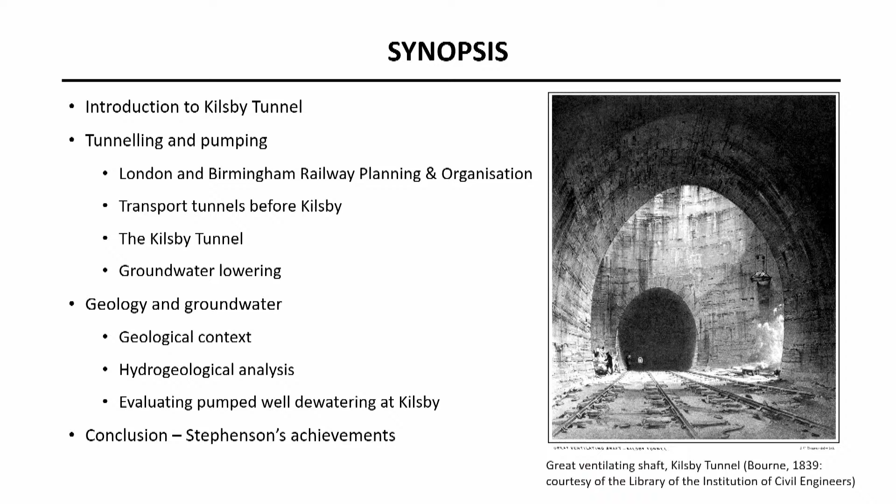I'm going to just run through what we're going to talk about quickly. I'm going to talk a bit about the tunnel, its location, and then about the tunnelling, how the work was carried out, how the project was organised, and, if you like, the history of the pumping and groundwater lowering in the 1830s, and Martin's going to take it from there and give it some real modern flavour.

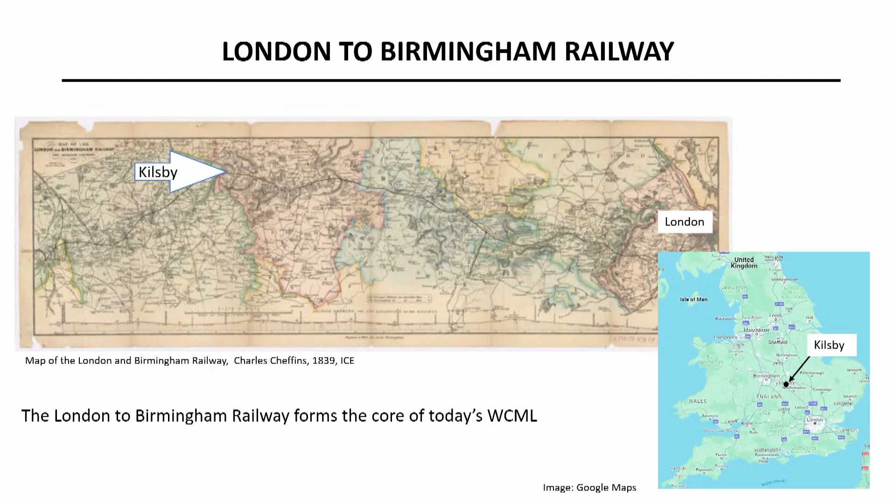So Kilsby Tunnel, for those who don't know it, it's under the Northamptonshire uplands. It's towards the northern end of the London-Birmingham Railway, and it was really on the route because the tunnel enabled a steady gradient to be maintained through the line, and they were very keen on minimising gradients for locomotive traction at that time, so Kilsby was there on the route. So, it was built 1835 to 1838. Robert Stephenson was the engineer. It was his first major project and really made his reputation internationally.

Kilsby was contract 7F. The contractor originally was Joseph Nowell, who came from a family of established contractors. It was one of 6 tunnels on the line, but by far the longest, and at the time of its construction, the longest railway tunnel in the world. Because of the problems which we're going to come to, costs escalated, they trebled. It was the biggest overrun on the line, which was full of overruns actually. And the major challenge was quicksand at the southern end, a large bed of it, which was unforeseen. And these problems were solved by means of an extensive groundwater pumping exercise, which was unprecedented for the time, coupled with careful observations which enabled Stephenson and his team to work a way through.

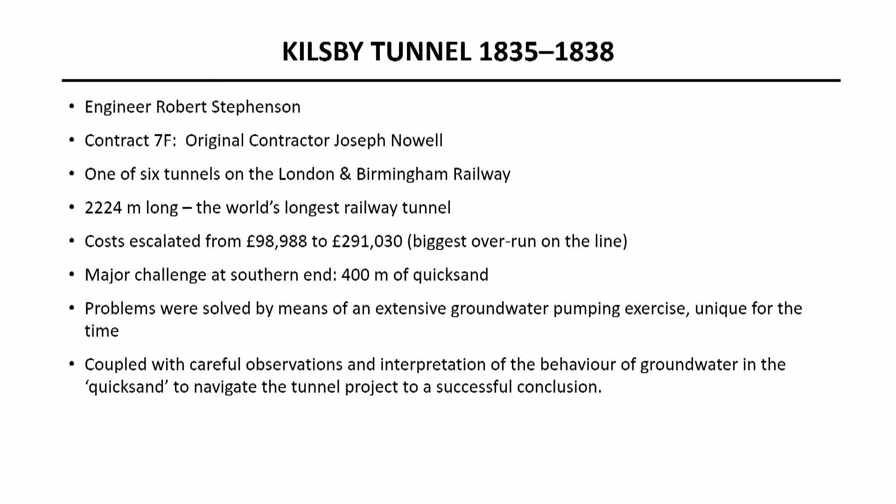So, the project, London to Birmingham Railway, its organisation really followed the typical organisation of construction contracts that have been in place certainly since the time of Smeaton on the Forth Clyde Canal, where you had the engineer, you had generally then for infrastructure projects, a committee of proprietors, and then under the engineer there'd be a group of resident engineers, assistant engineers in charge of parts of the line.

And in the case of this line, there were committees at the north and south, at the Birmingham and London end, and there were assistant engineers, Gooch, Forster, Crosley, Buck and Fox, covering roughly equivalent sections of the project. So Gooch was at the top and Fox at the bottom end.

Crosley and Buck were very experienced canal engineers, much more experienced than Stephenson at the time, whereas Gooch and Forster were more or less contemporaries of Stephenson, and Gooch had been George Stephenson's amanuensis on the Liverpool-Manchester.

Like most of these projects, there were surveys carried out. The surveys had begun in the 1820s, and two rival companies were trying to get an Act of Parliament through. In the end, it was the Stephenson route that prevailed, although the first bill they put forward was unsuccessful. And once the Act was passed, they moved fairly quickly.

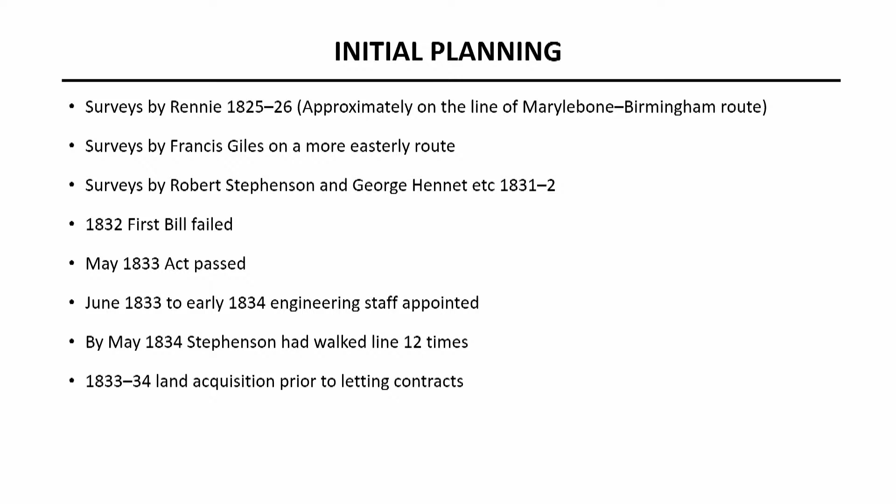Well, Stephenson's decision was to let the lots in relatively small lengths because he was concerned about the capital resources of the contractors. And I think the size of the contracts actually put off the more successful contractors because there wasn't enough money involved. But Kilsby Tunnel was pretty evidently going to be quite a challenge, so it was a contract on its own. Most of the contractors had considerable experience, including Nowell.

The contracts were let from May 1834 to December 1835, and they started with the north and southern end because they wanted to get traffic moving as quickly as possible, and detailed specifications and contract documents were provided so the contractor knew as much as the engineer knew about what the job involved. And this was the approach that Brunel directly copied on the Great Western and elsewhere.

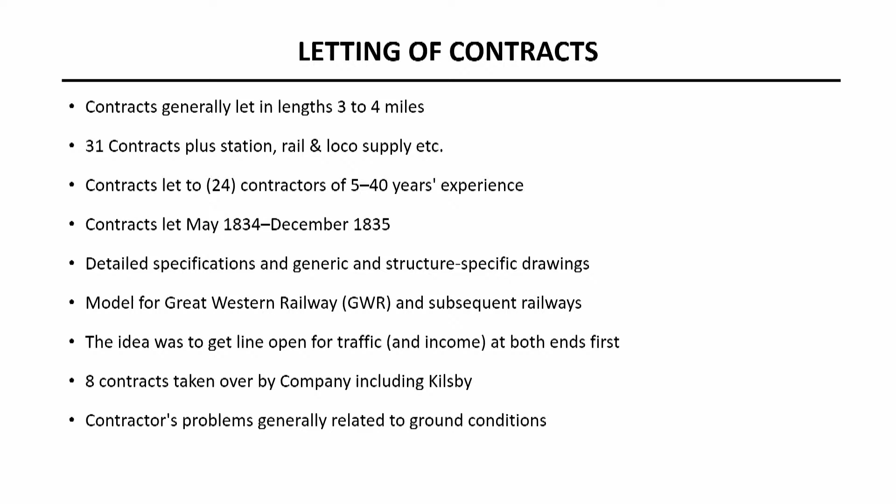Many of the contractors failed or ran into financial difficulties, including at Kilsby, and these were generally due to the ground conditions. So, a bit of context, transport tunnels before Kilsby: well, it had 70 years of the canal age, really, and there were at least 10 canal tunnels that were longer than this, and many of them had had problems.

And interestingly, Stephenson had only envisaged 6 shafts on the length of this, and all the precedents really had far more working shafts involved. If you work out the time he thought it would take, the 6 shafts might have worked, but they didn't really take account of the geology. And there was also an enormous difference in the kind of pumping and access equipment used.

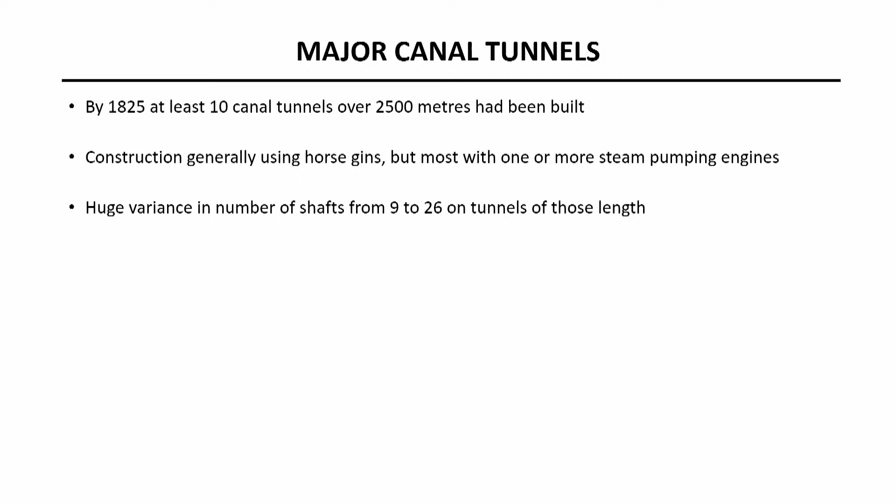So in the canal age, really portable steam engines, sort of steam engines you could move around on site, prior to 1800 weren't really available. So most of the tunnels were worked using horse gins to get material in and out. This is a drawing from about 1820.

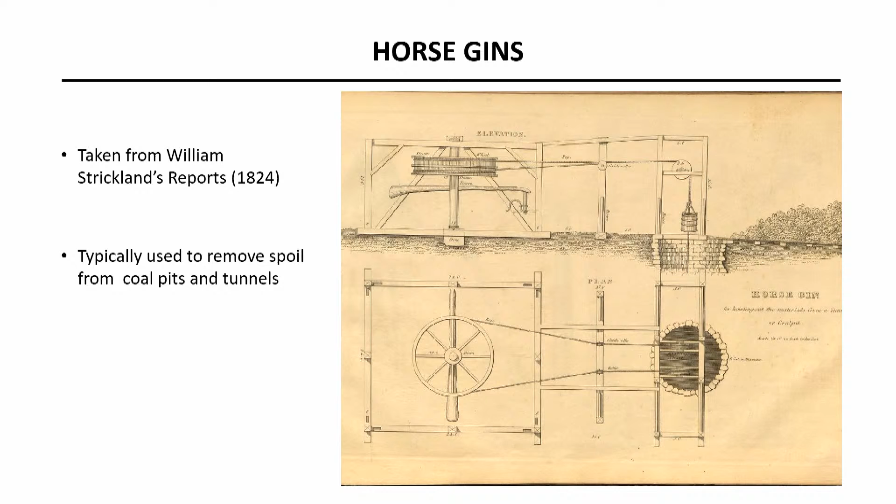But by 1820, tunnelling had come on quite a way, and there were 3 tunnels built around that time by Pritchard and Hoof, who were contractors who worked on a different length of the London-Birmingham Railway, who proved very experienced. And on the Strood Tunnel and Harecastle Tunnel, which were 2 of the longest, they had, hopefully you can see here at least, some dismountable centering, and these tunnels were built in the space of 2 or 3 years, whereas many of the 18th century tunnels had taken considerably longer.

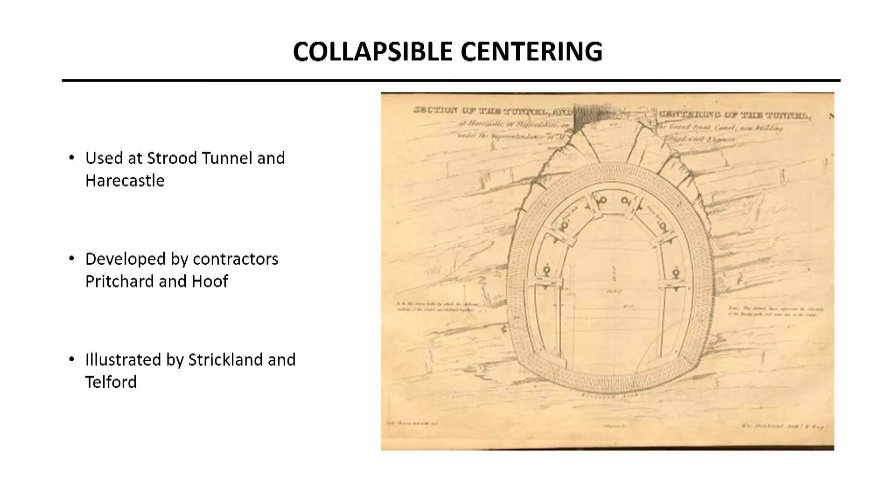Wapping was reasonably successful. Canterbury, on the Canterbury and Whitstable Railway, was completed before Kilsby began. But the tunnel on the Leicester-Swannington Railway hit difficult ground conditions, which really anticipated the sort of problems that Stephenson faced at Kilsby. And the initial contractor failed, and the supervision of the engineers was not up to scratch.

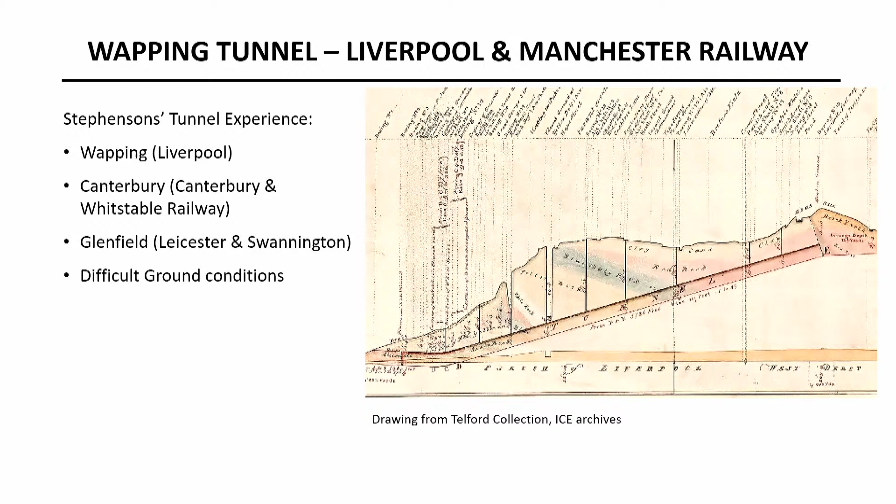That is a bit of a contrast with what we'll discover about Kilsby, really. So Kilsby, a lot of experience here. Stephenson was a mining engineer. Frank Forster, in overall charge of the section, was a mining engineer from the North East.

Charles Lean, who was the junior engineer in charge of the Kilsby Tunnel itself, came from a family of Cornish mine engineers. And the Nowell family, they were very successful contractors. They'd been particularly commended by Telford for their work on the Macclesfield Canal in the 1820s. So everybody knew what they were doing, and everything looked set fair.

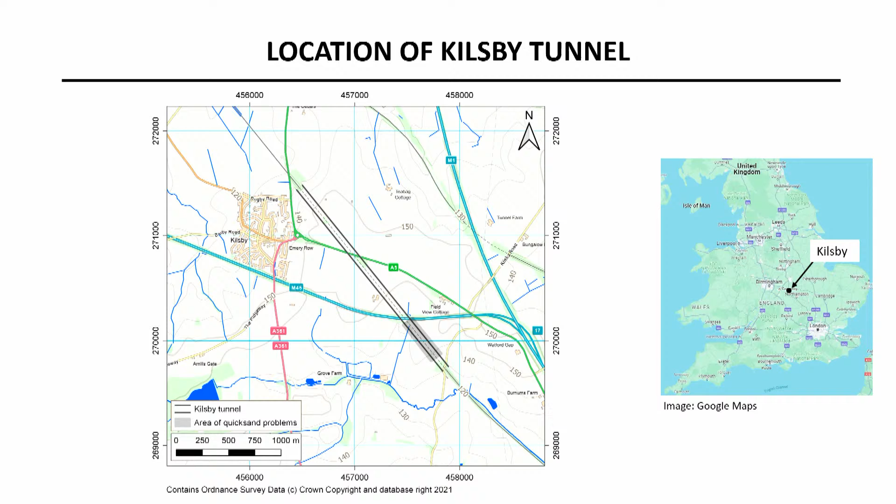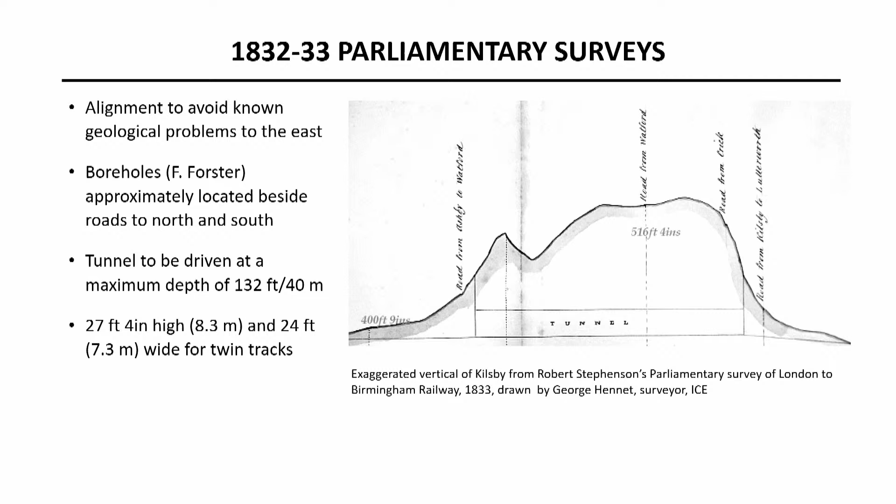And so they had no reason initially to panic about whether they were going to hit anything awful. I mean, it was a long tunnel. They knew there might be some problems. But they felt the strata would be continuous, and so they began work. And the first thing Stephenson's team drew up was a specification and drawings for the tunnel. So the drawings showed the portals, cross-section of the tunnel, how it was to be built, with details of the lining, etc.

Initially, it's a sort of 14 to 18-inch lining, and they were using a lime that had some pozzolanic qualities with sand, puddle clay backing, and they had skew backs, which I'll show in a later drawing, on which they built off the brickwork, with 6 working shafts, 2 ventilation shafts, and air shafts to be built as required. And although there were 6 tunnels, the specification varied slightly. So Stephenson was aware that the ground conditions varied from tunnel to tunnel. They weren't all exactly the same.

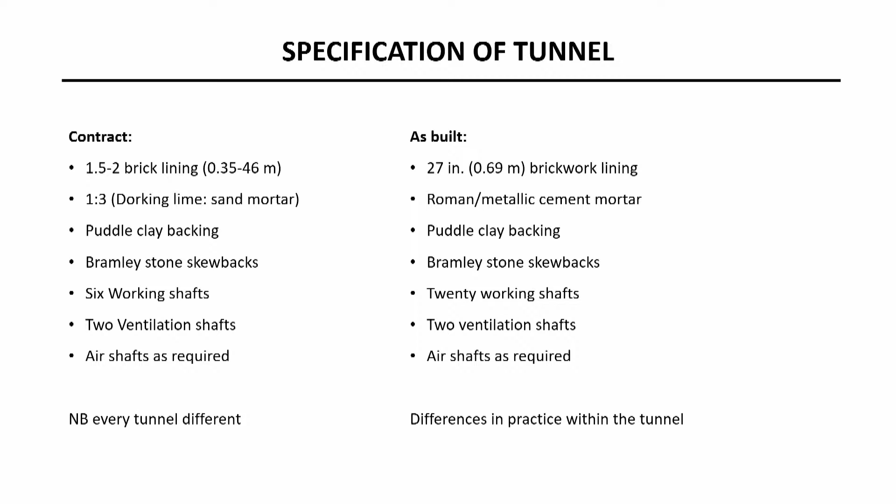What were they expecting the contractors to do? Well, as built, it's a 27-inch brickwork lining. They used Roman cement because of the water, really. The backing's there, the skew backs are there, but there are 20 working shafts. The ventilation shafts are the same numbers and the air shafts. So if you want to see initially why it cost a lot more, well, there's a lot more stuff going on.

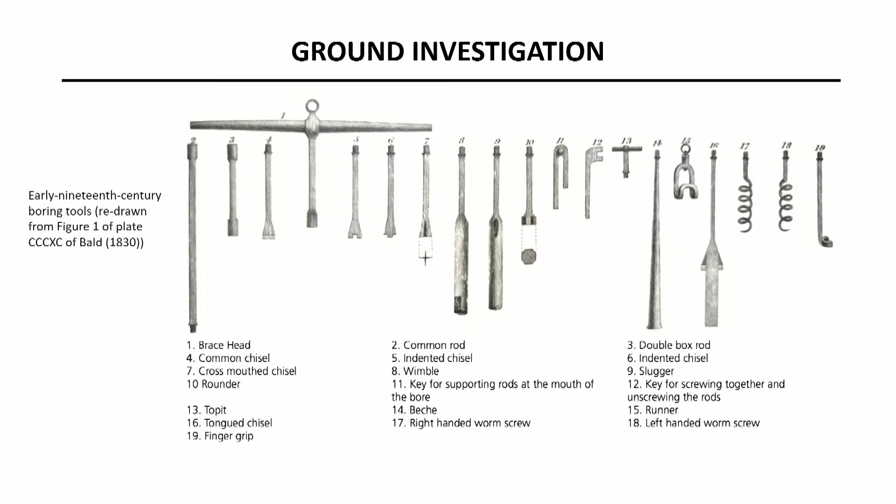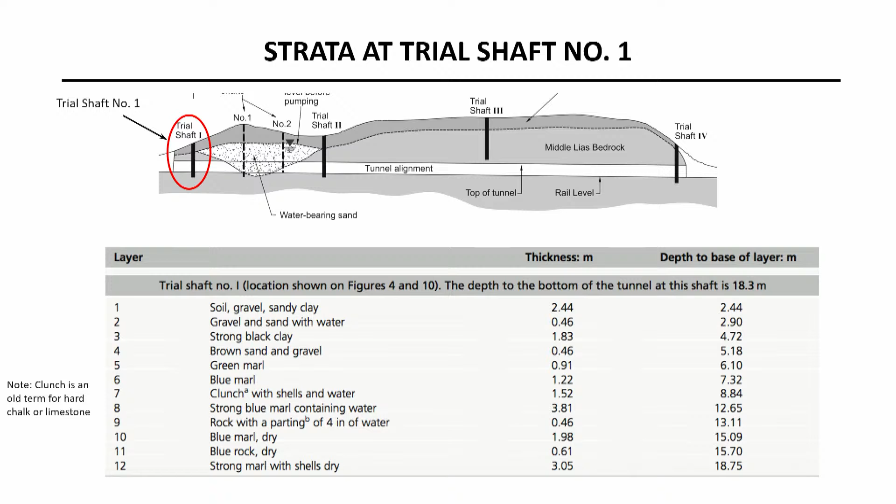And just to give you a flavour, these figures here are taken from the drawings in the ICE, and they give the strata quite detailed. So these are the trial shafts. This is trial shaft 1 here. So you've got obviously the soil at the top, and strong marl at the bottom, dry blue marl, rock with the parting, a bit of water in there. But again, nothing they wouldn't normally think they could contend with. So these were quite good ground investigations, given the number that they dropped in.

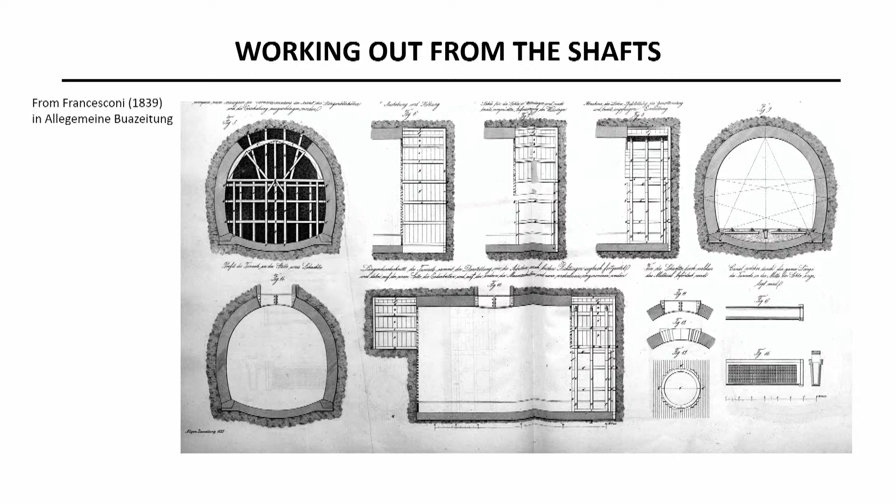And they would have proceeded as here. So this side, once the timbering was done and the heading opened out and everything, the brickies would have been in building up on this side, and then they started on that side. So those doing the excavation, the miners, weren't interfering with the team there. And that's how things were meant to proceed.

And you get a bit of a sense of the scale of it from this. This is a view that was taken in July 1837. You see horses down the bottom. They got the rails in place to move stuff around. There's allegedly 2,000 people working on the tunnel, 200 horses, and perhaps 13 steam engines and a number of horse gins as well. And you can see just about here a man coming up taking up a bucket of spoil. So labour intensive, some mechanical support.

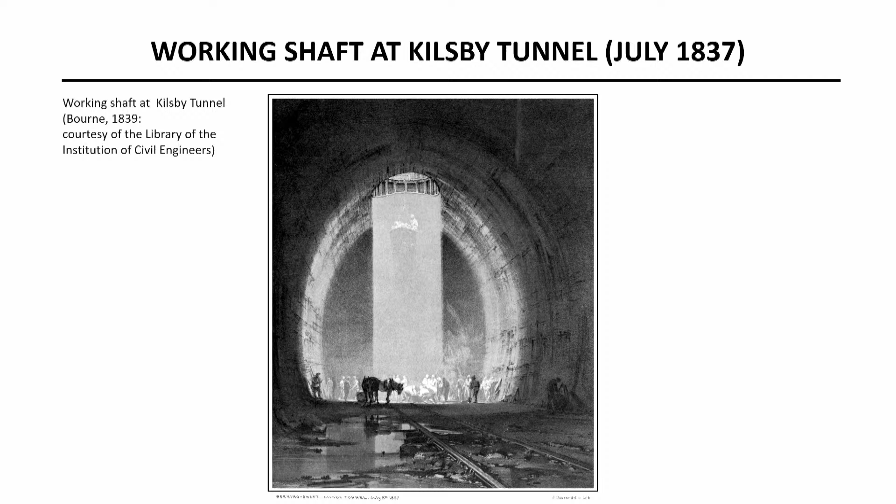So the shafts were sunk in to a depth of 10 foot, and then they bricked them up in sort of 6 to 10 foot lengths as they went round. And the two ventilation shafts were absolutely enormous. They were supposed to have contained 1 million bricks, and they were taken down to formation level because they couldn't see how they could support these. They were 60 foot in diameter, how they could support the weight on the crown of the tunnel. So they were taken right down to the bottom. And the view over here shows the headgear for moving plant and stuff. So the ventilation shafts were used as well to move stuff up and down from the tunnel.

And before I get on to the groundwater issue, there were other issues with water ingress on the tunnel. And Lean, allegedly, well, certainly, saved a group of miners. Where one section had been flooded, they started using a raft, floating it along and getting the bricklayers to the front of the excavation and start bricking it up there, supporting it there from a raft as quickly as possible to prevent collapse.

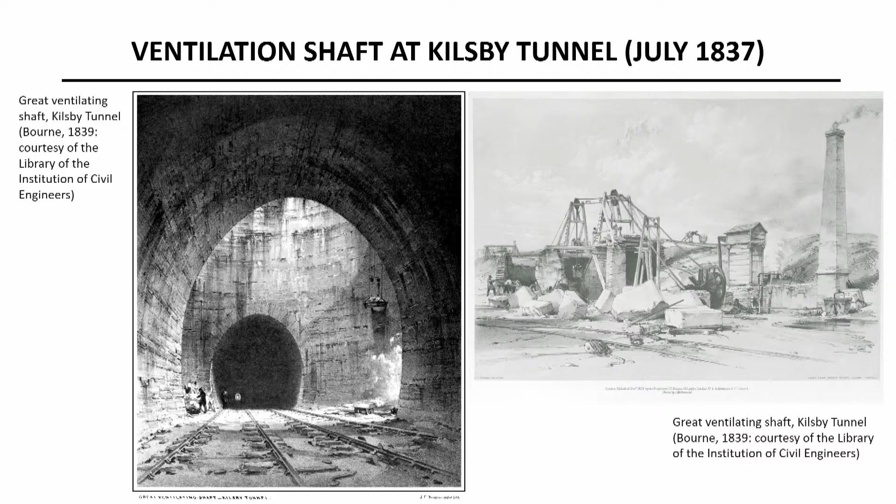Well, some water inevitably came in before they'd finished their work, and they were in danger of drowning, but Lean swam from the nearest working shaft and is supposed to have hauled them with a rope between his teeth back to the working shaft and saved them. There were 28 people died on the job, so he didn't save everybody. Anyway, the great problem very clearly was with this bed of sand that we've seen on the section.

So Forster's boreholes didn't really give a clue as to the likely danger of quicksand. And in May 1835, the contract was let, and soon afterwards, Nowell got on site, and he began sinking 4 shafts, and he put up a steam engine, which was probably to deal with anticipated pumping, but also to bring stuff up from the working shafts.

But in September, they hit a bed of quicksand from working shaft 2, and the usual method of dealing with something like this would have been to drive an adit, perhaps have parallel drains along the tunnel as they've done with some of the canal tunnels nearby. So they did try a couple of drainage adits, but they almost immediately blocked up with sand, and no water came out, so they had to think again. So they were wondering what to do.

Stephenson realised they needed some pumping power, so they ordered 2 more steam engines, 20 horsepower and 25 horsepower, but they took some time to get on site. They tried looking for an alternative alignment, but Forster couldn't find a better route through the Kilsby Hill, and if they went somewhere else, they'd have needed another bill, and they would also probably have lost the confidence of the shareholders, and the railway scheme might have been sunk, so they persuaded the directors that the best thing was to keep on at it.

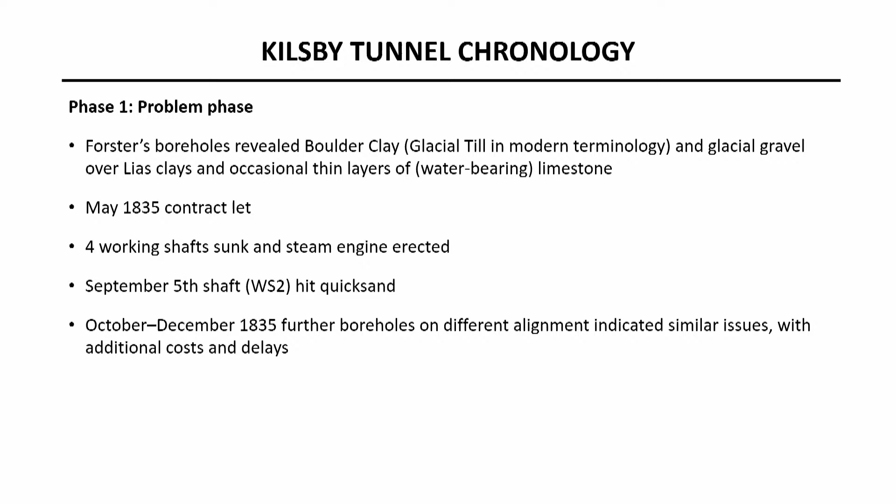And I think at that stage they thought they'd just pump the quicksand dry. The typical mining solution, if you like, at that time would just pump, and hope the thing, to an extent, went away. So they realised they could increase the effectiveness of the pumping engines if they used a flat rod system, which I'll show a picture of in a moment, which meant they could have more than one shaft operated from the pumping engines, and also they could be off the line of the tunnel, not interfere with the tunnel working as well. So it was a well-known technique certainly in Cornwall at the time, so it might have been Lean who suggested it. Well, Stephenson was a bright enough guy to have thought it up for himself, I'm sure.

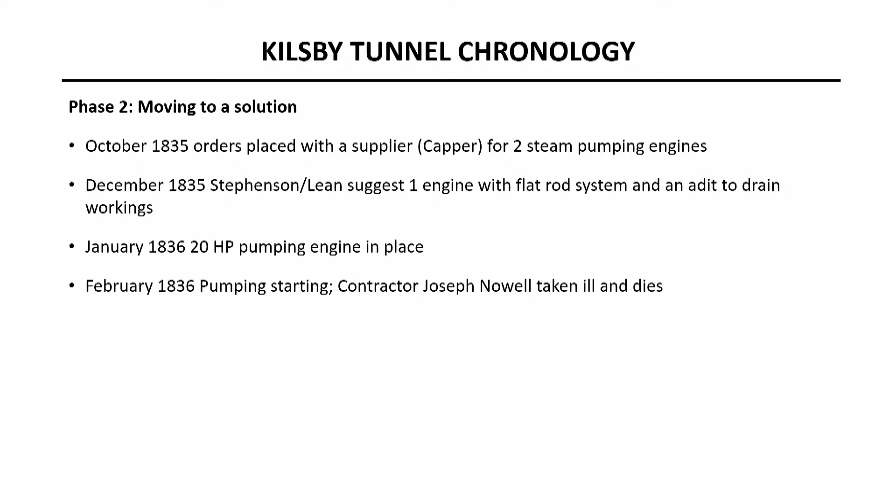So in January 1836, they got a pumping engine going, they start pumping, and Nowell, relatively elderly, suffers a heart attack. In some accounts it's suggested it finished him off, but I think the real problem with the contractor was that Nowell's death meant they had no capital, they had to sort out his estate, so they couldn't carry on. So it really fell to Stephenson and Lean to work out what to do, and in a sense Stephenson becomes the contractor.

It's a direct labour job, and he does the sort of things you'd expect a contractor getting first onto site to do. Build a railway over the hill so he could move people and muck around and equipment. Have more working shafts so you could maximise what's going on in the dry bits of the tunnel while they sort out the quicksand problem, and power those in the deeper sections with 6 additional 6 horsepower engines, with a larger one to act as a mortar mill for brick making and cement making. And at that stage, I think he thought they needed 20 million bricks. Well, they needed a lot more than that in the end.

So they sunk pumping shafts off the main tunnel alignment. They were sunk with timber tubbing rather than with brick lining. They reached rail level 6 to 7 months after they'd started work. So it took a long time before they started to really get going in the quicksand. And they began sinking the shafts into the quicksand in November, and then began tunnelling in December. And you'll hear a bit more about how that became possible from Martin.

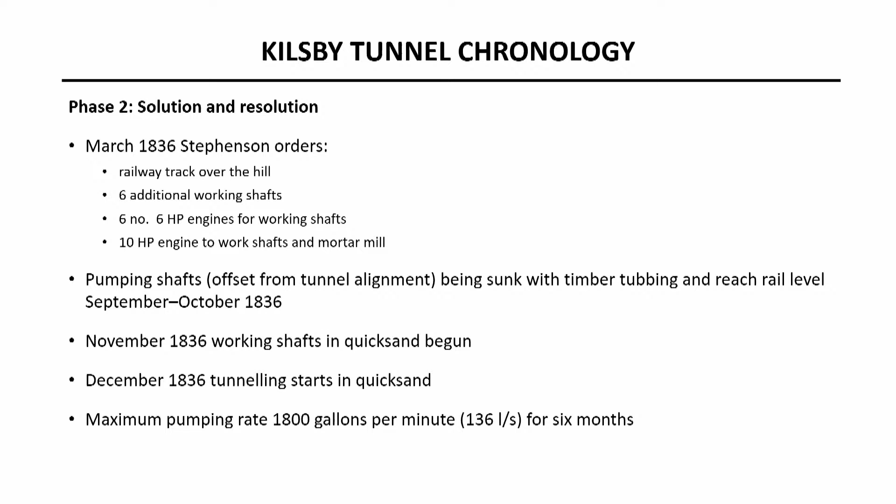But the amount of water they were pumping out, 1,800 gallons a minute, 136 litres a second for 6 months. And so it went on. There were inrushes. It wasn't really until the tunnel was finished that you could say it was safe from collapse. And just to give you an impression of the additional, there were originally meant to be 6 shafts on the line of the thing.

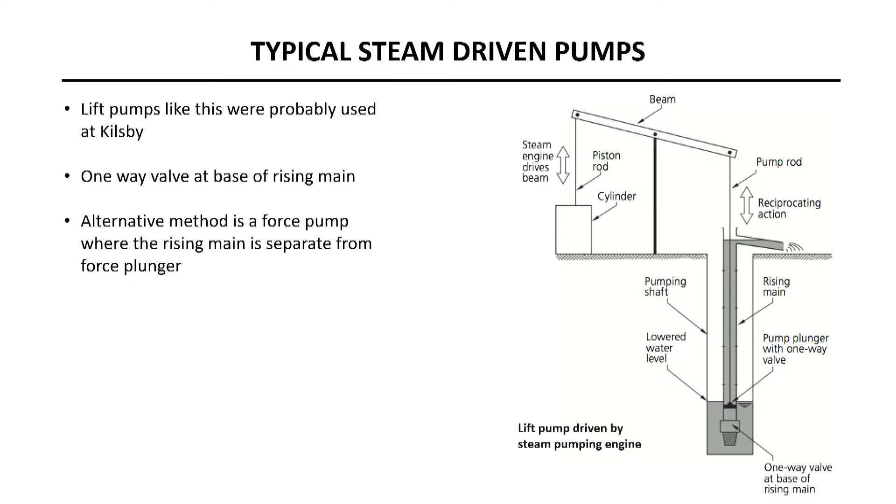It was a great team, and just to give you a flavour, I'm going to end with a couple of quotations here, just to put what Martin's got to say in some context, really. So, this is for the bricklayers. Even while under the protection of the immense pumping power, it often happened the bricks were scarcely covered with cement, ready for the setting, ere they were washed quite clean by the stream of water which poured down overhead. The men were accordingly under necessity of holding over their work huge whisks of straw and other appliances to protect the bricks and cement at the moment of setting.

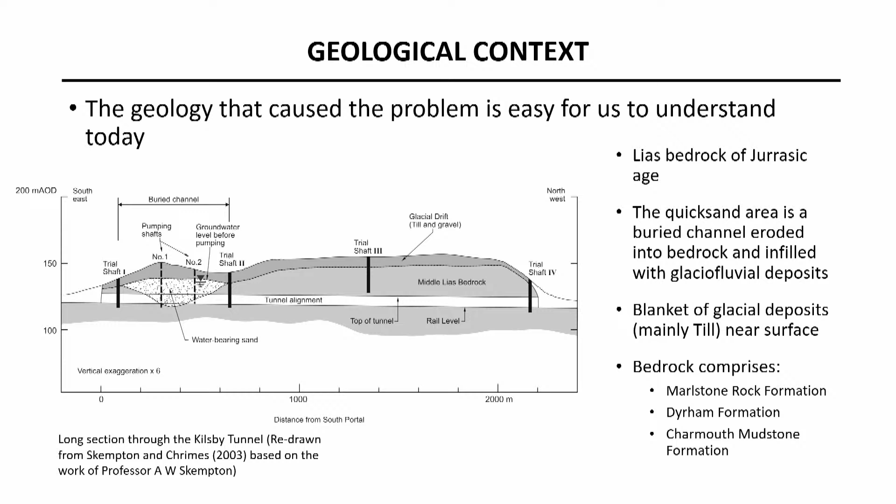So the question is, how do we know? What information do we have about the geology? And we actually have the as-built geological records. There is a digitised version of a long section from the 1830s, and that is the actual paper copy laid out upstairs in the library.

And any of you who've ever logged a face or you've tried to convert daily records into a record of what the tunnel's been through, you can totally get what these people have had to do. You can see how difficult it is to read at any scale. You know, it's a bit of a legend there and so on, because you've got a very long linear structure. The coloured pencils have been out and so on. But obviously, when you get it in your hands, it's tremendously impressive and actually very informative.

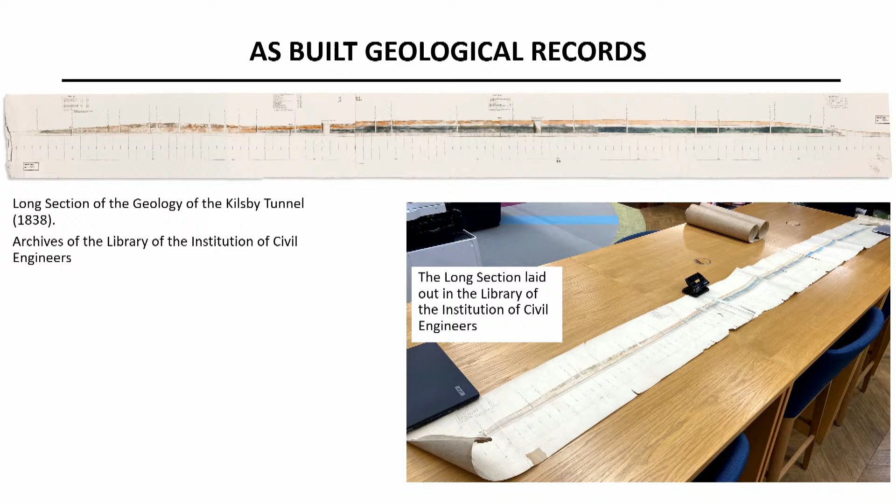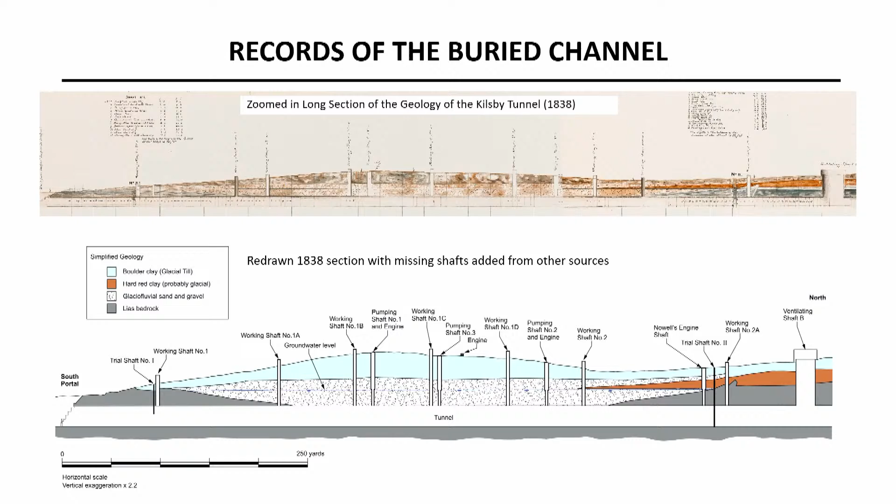But I don't think even if you had modern information, you would automatically think that there was a big channel of buried granular material there. But I think you would possibly pay attention and maybe investigate in that area, because you'd use the mapping to help direct and inform your planning for the boreholes and so on. Stephenson obviously didn't have that opportunity to use that information, and the project boreholes or shafts missed the problem ground by only a little bit. I mean, probably a few people in this room, like myself, think we have, during our career, encountered unforeseen ground conditions, but I think Stephenson has a pretty solid case, as we'll talk about in a moment.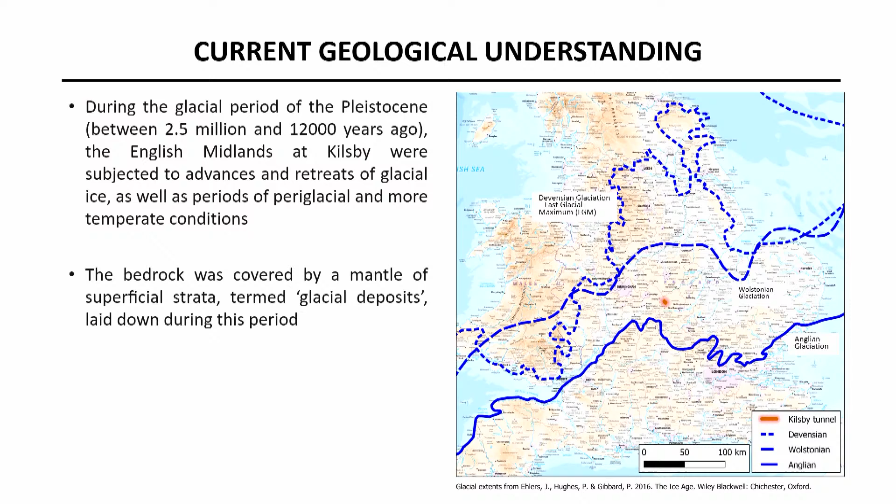And so because we know that the UK has been glaciated in its northern parts, we know that the movement of the ice has left behind a potentially variable layer of superficial deposits that we term the glacial deposits.

And a really key issue is that the bedrock profile might not follow the ground surface, because the advance and retreat of the ice is very abrasive, but then as well you can sometimes get glacial lakes dammed behind ice that can be suddenly released, and you get erosion channels associated with the bursting of ice dams.

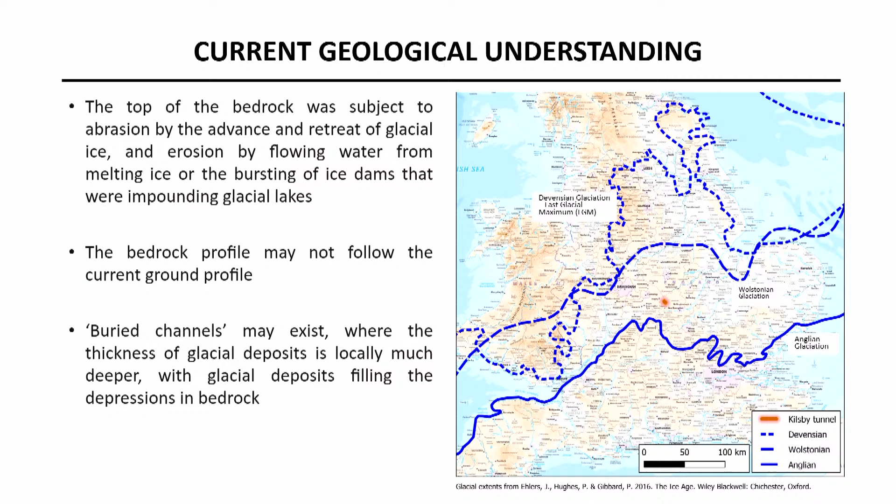So you get scenarios, and I've encountered many in my modern career, of buried channels in the bedrock below the superficial deposit. And even today, they're nearly always bad news in groundwater terms. But that's modern knowledge, so we need to put ourselves back to the 1830s.

And the 1830s was a time of rapid development in geological knowledge. And in the UK, it was actually driven, broadly speaking, by the construction industry. Land drainers, canal builders, they sort of exposed lots of geology. And William Smith famously produced the first map representing the surface geology of the UK.

And if you've not read the book, The Map That Changed the World, it's quite an interesting story, both about the map and about Smith himself. And this is one of the versions of Smith's map. There's no evidence that Stephenson directly used Smith's map, but it's quite clear from Stephenson's general methods of working that he and his advisors will have consulted experts with local knowledge, and they will have used the most relevant information.

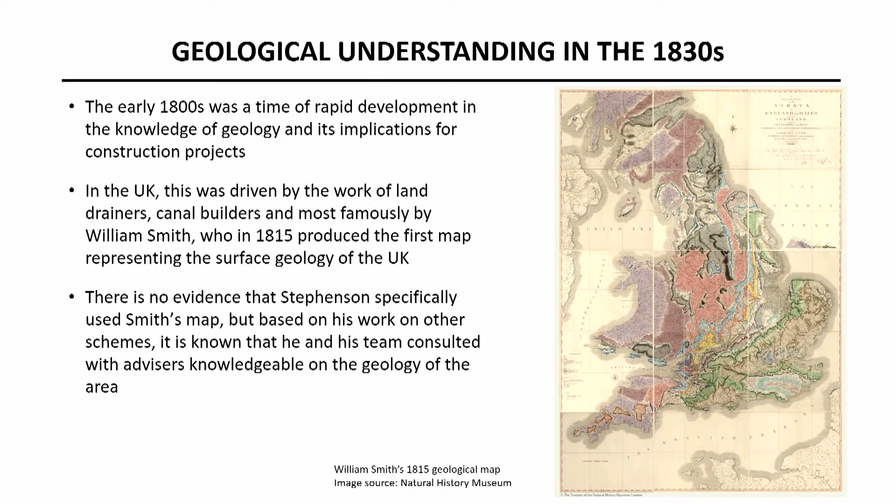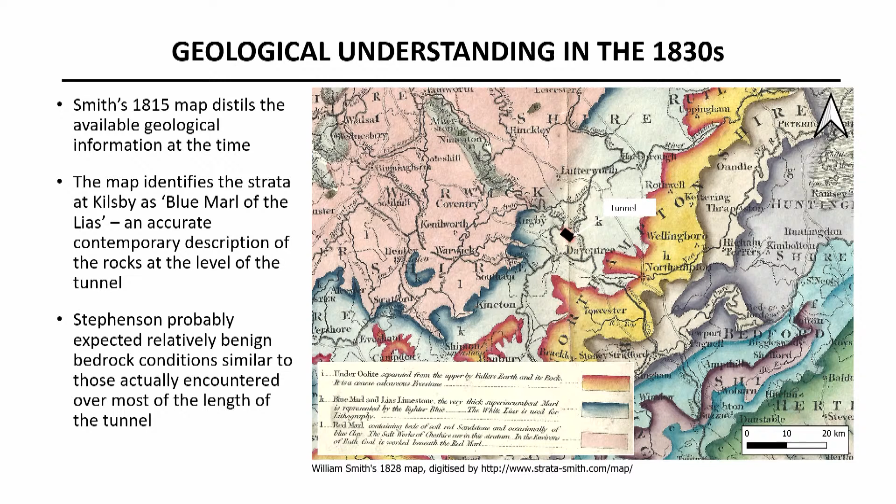So the question is if we can look at Kilsby on Smith's map, how does it compare? And in terms of the bedrock geology, Smith's map is spot on. So there's the Kilsby Tunnel, and it's in something known as the blue marl of the lias, which nowadays we'd think would be a mudstone or a marl. Pretty accurate description of the bedrock conditions that Stephenson encountered, and again a relatively benign tunnelling medium, which is what he actually encountered over the majority of the tunnel length.

And what's interesting, and it didn't really strike me until I was quite a long way into researching this, was that the contemporary reports discuss the groundwater problems almost solely in terms of bedrock. They assume that the water's come from the bedrock, whereas in reality it isn't. It's a much younger strata of glacial deposits. And this is a really key point, again, that I hadn't understood, that the nature and the origin of glacial deposits was not well understood in the UK in the 1830s.

But in the 1830s, glacial theory, as it was known, because it was a theory, was not an accepted concept in UK geology. It's pretty amazing to think that in the early 19th century, many experienced geologists subscribed to the diluvial theory, where the superficial deposits were termed diluvium from the biblical flood, as in diluvium, deluge. And there are papers about the conflict that many clergymen, who were also geologists in their spare time, had when glacial theory subsequently arrived. And glacial theory arrived after Kilsby.

The first serious consideration was probably a meeting in 1840 at the Geological Society of London. Here's the original record. And at the meeting, the Swiss paleontologist Louis Agassiz presented his paper, which was called On Glaciers and the Evidence of Their Having Once Existed in Scotland, Ireland and England. And again, glacial theory was not instantly accepted. There was no eureka moment. But in the following decades, British geologists accepted that the evidence of erosion, transportation, deposition of superficial deposits in the UK could be explained, indeed, by this theory.

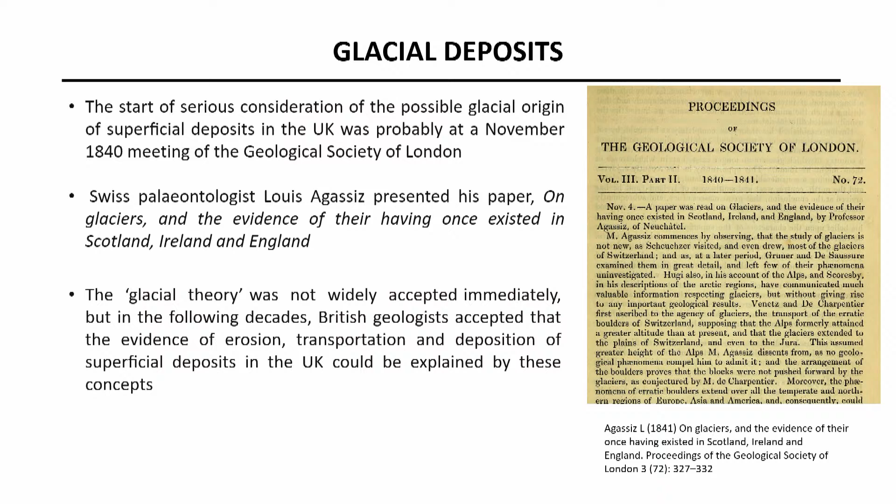But then, how does that relate to construction? And even at the end of the 19th century, the actual impacts of glacial deposits on construction were not widely recognised. Professor William Boyd Dawkins was a very eminent 19th century geologist, and in 1898 he gave his James Forrest lecture to the ICE, I imagine, in this very room 126 years ago.

And his lecture was on the relation of geology to engineering, and he said, at first sight, it would seem improbable that geological theories connected with the Pleistocene age and the glacial period should have any relation to engineering work. Nevertheless, they have a most important bearing on engineering results in connection with the superficial accumulation covering the solid rocks over a large portion of the British Isles.

So, viewed in the light of the absence of understanding of glacial theory, Stephenson's problems absolutely are unforeseen ground conditions, not predicted by his team or encountered by precision borings. It seems, like Mike said, just bad luck or random chance that borings missed the buried channel of sand.

And I know David Hartwell's in the room, and David Hartwell, I believe, worked on a project in the 90s where the boreholes missed a buried channel in a rock tunnel and caused various problems. In the paper we do talk about how there's still modern parallels to this.

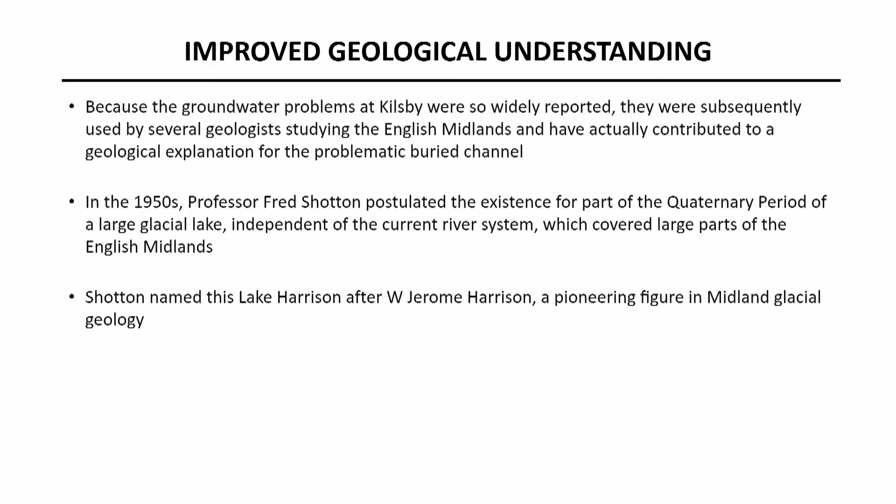Another really fascinating thing is that at Kilsby Tunnel, the problems helped explain themselves, by which I mean that the groundwater problems are so widely reported, subsequent geologists in the 20th century actually used that information to better understand the geology of the English Midlands. In the 1950s, Professor Fred Shotton postulated the existence, for part of the Quaternary period, of a very large glacial lake independent of the current river system, which covered large parts of the English Midlands. And Shotton named this lake Lake Harrison after W. Jerome Harrison, a pioneering figure in Midland glacial geology.

Now let's do a bit of geotechnics. And like Mike says, Stephenson was all in on this project, and by the time he was committed to dealing with it by pumping, it must have been a daunting prospect to try and drain the whole of the quicksand. And there were no analytical tools to hand, never mind no computers, there were no equations. Darcy's law, I'll talk about in a moment, was still 20 years away. But Stephenson used observation and logic, presumably, to understand the effect of pumping from widely spaced wells, and he deduced it was not necessary to drain the entire body of sand.

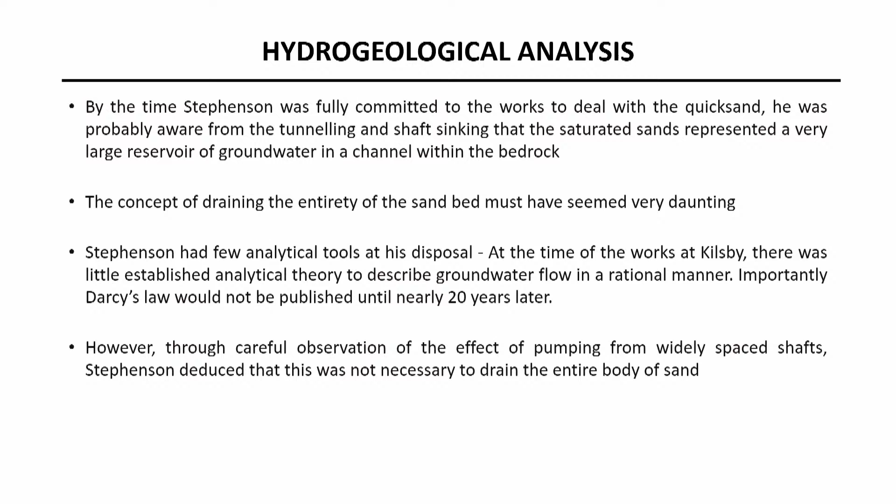And again, Stephenson wasn't a prolific author of papers, unlike others, and so he didn't really write up this aspect of Kilsby at the time. But several years later, he was working on the water supply to London, looking at abstraction from the chalk in some areas. And in the 1841 reports about the water supply of London, he talked about his personal observations at Kilsby, and he said, so we talk about pumping from shafts:

I was soon much surprised to find how slightly the depression of the water level in the one shaft influenced that of the other, notwithstanding a free communication existed between them through the medium of the sand, which was very coarse and open. It then occurred to me that the resistance the water encountered in its passage through the sand to the pumps would be accurately measured by the angle or inclination which the surface of the water assumed toward the pumps, and that it would be unnecessary to draw the whole of the water off from the quicksand, but to persevere in pumping only in the precise level of the tunnel, allowing the surface of the water flowing through the sand to assume that inclination to which it was due to its resistance.

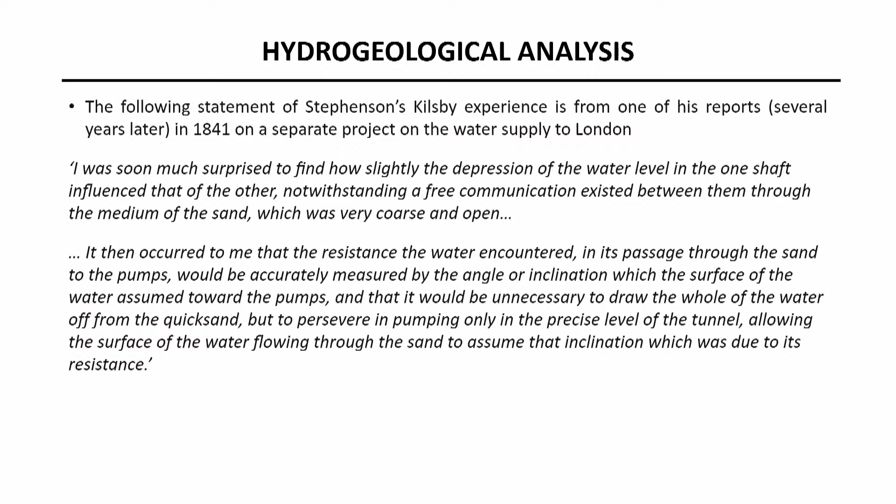Very wordy, but I'll explain to you what this means and why it's relevant. So here we have the sort of thing you might see in a textbook. We've got our Kilsby Tunnel being dewatered in this case by some hypothetical shafts on either side. And we all know that if the dewatering works, we draw down the water level at the tunnel, but we don't draw the water level down an infinite distance either side. We get something that we might term a drawdown curve, and we know if we go a certain distance away, the water level will eventually get back towards its original level.

Stephenson proved this. He installed some distant monitoring wells 180 metres from the tunnel and showed that after 12 months of pumping while the shaft was dewatered, the groundwater level there had hardly been reduced. And he wrote again in 1841,

the simple result, therefore, of all the pumping was merely to establish and maintain a channel of comparatively dry sand in the immediate line of the intended tunnel, leaving the water heaped up on each side by the resistance which the sand offered to its descent to that line on which the pumps and shafts were situated.

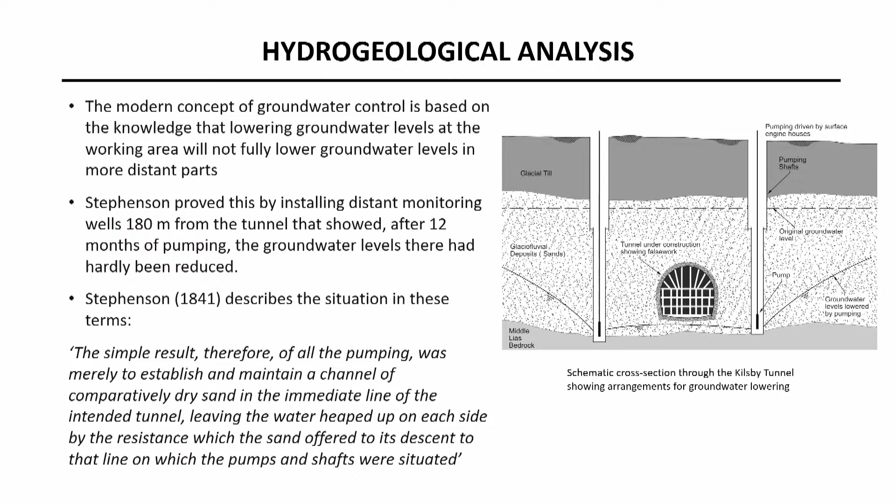And so Stephenson concluded that the water flowing through a granular soil had to have some sort of driving force. There was a resistance. And so when you abstract at a certain point, at a well or a shaft, the water flowing to that level has to have some energy to overcome that resistance. And the way that driving force or energy is provided is that the groundwater level or head at the distant point must be higher than at the shaft, and that's what drives the water towards the shaft or the well

to overcome the resistance. And Stephenson's observation of the gradient of the lowered water table, that we'll call the hydraulic gradient, predated theoretical formulation of groundwater flow, including Darcy's law, by nearly 20 years. But I've applied, compared with modern theories, including Darcy's law, and we can understand how prescient Stephenson's work was.

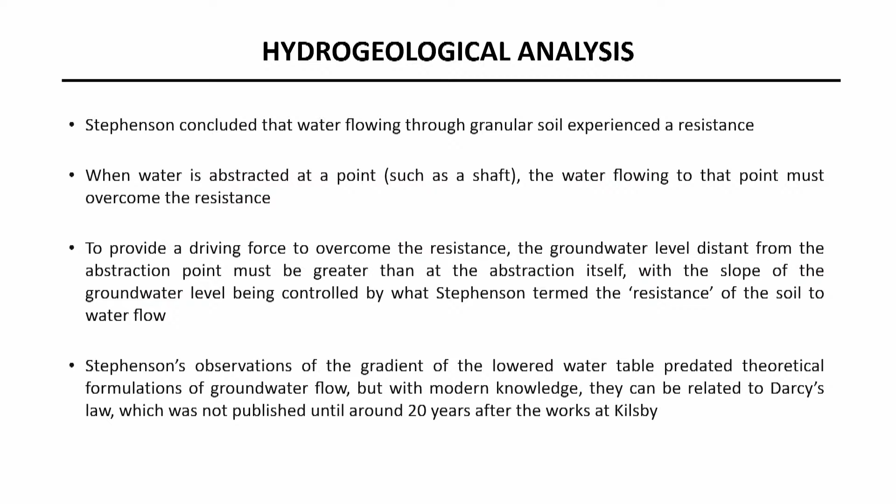So I've mentioned Darcy's law, and hopefully most of you have heard of it. Darcy's law is a really fundamental equation in geotechnical engineering, but it's not actually of geotechnical origin. It actually comes from the field of public health engineering. And it was developed by the hydraulics engineer in France, Henri Darcy. And he wrote in 1856 a report. I'm not going to butcher the French, but his report was basically in English, The Public Fountains of the Town of Dijon. So it's surprising that we're using information from that in our geotechnical analysis.

But he had various vertical columns of sand. This is an illustration from the original report. And he was observing the flow through the sand vertically, and he related the flow rate to the hydraulic gradient. And he developed an equation, Darcy's law, that related flow through the granular medium to the applied hydraulic gradient. And the relationship between the applied gradient and flow was linear.

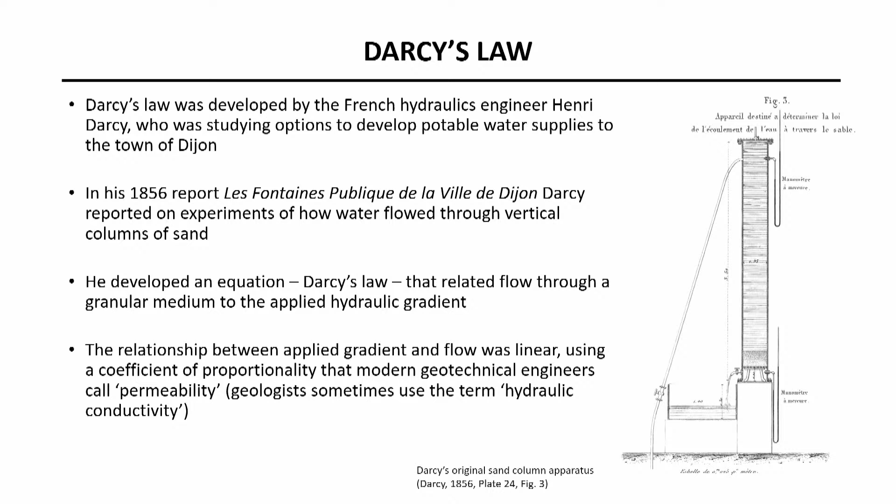It's normally expressed as the groundwater flow rate Q is equal to the product of permeability K, permeability also being known as hydraulic conductivity. So Q is the product of K, the hydraulic gradient I, and the cross-sectional area A. The negative sign is really important because it means that groundwater logically flows from high head to low head. It flows down the hydraulic gradient. We can also express the hydraulic gradient in terms of a head difference delta H and a flow path length L, and that therefore tells us that the hydraulic gradient is actually the slope of the water table at any

particular point. So if we try and visualise that in terms of a tunnel with wells either side, I drew this diagram to illustrate a sort of theoretical thing in a lab and the real world scenario. So this is in a lab, and imagine that we have our reservoirs of water either side with a high head, and we just add water in to keep it topped up. But in the middle, we have our low head. This is where we're dewatering the tunnel, and we're taking some water out. Just by conservation of mass, the water flows in from both sides into the middle, and basically this flow is determined by Darcy's law, and we have a hydraulic gradient there.

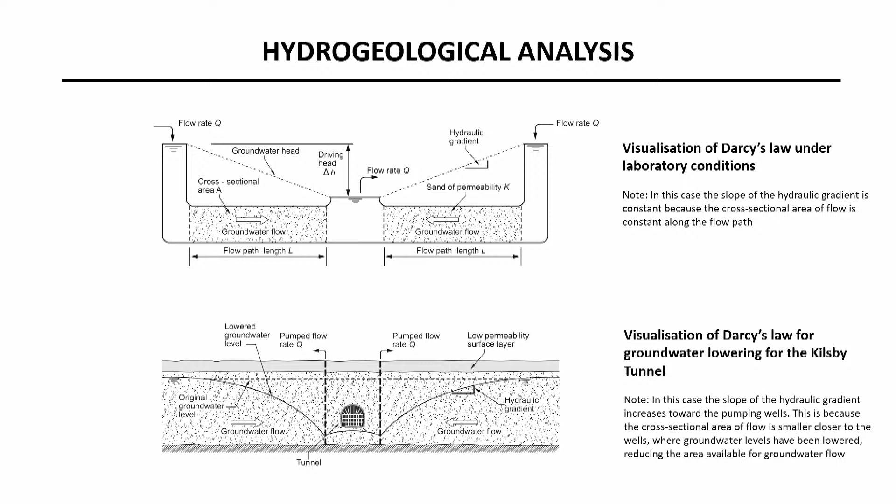And then in the real world, even though this is very schematic, we have our dewatering system around our tunnel, we've lowered the groundwater level here, and we have the water flowing here. The reason this is a curve, the hydraulic gradient's a curve, and it's a straight line here, is because the geometry is different, but the principle is the same. The point is the hydraulic gradient is the slope of the water table at any given point. So how do Stephenson's observations relate to Darcy's law? Because Stephenson does not use the term permeability or hydraulic conductivity.

He uses the term resistance, and he stated, leaving the water heaped up on each side by the resistance which the sand offered to its descent to that line on which the pumps and shafts were situated. And mathematically, the resistance is the inverse of conductivity. So we can express the resistance here as 1 over K. And we can rearrange Darcy's law that shows us the hydraulic gradient. I won't go through the maths, but we end up with the hydraulic gradient is indeed proportional to the resistance.

And so, based on observation, Stephenson expressed in words rather than mathematics essentially the fundamentals of Darcy's law 20 years before. So there is an alternative timeline. If Stephenson had been better at writing up his site notes, we might be talking about Stephenson's law and hydraulic resistance instead of hydraulic conductivity.

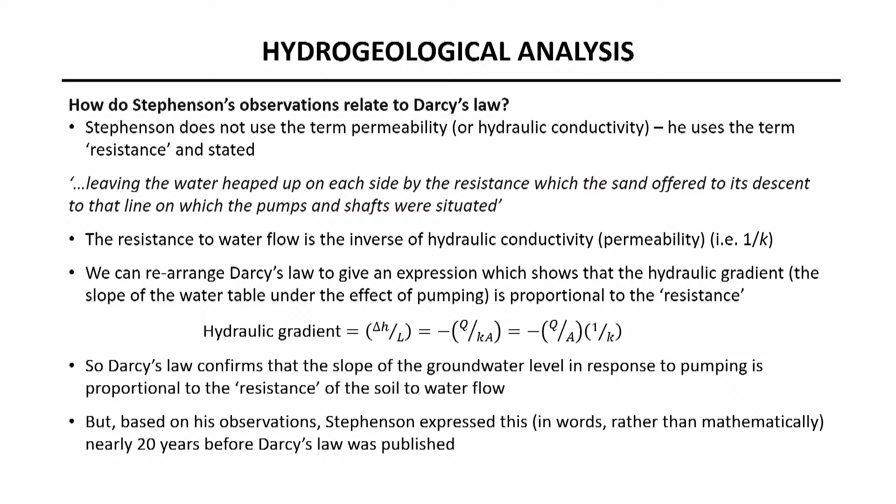So the final part of the talk is I just want to evaluate the use of groundwater lowering, because the Kilsby Tunnel in 1835 to 38 is widely quoted in literature as being the first application of pumped well groundwater control. That's not strictly true, because a few years before, the elder Brunel, Marc Isambard, used groundwater lowering when sinking the Rotherhithe shaft.

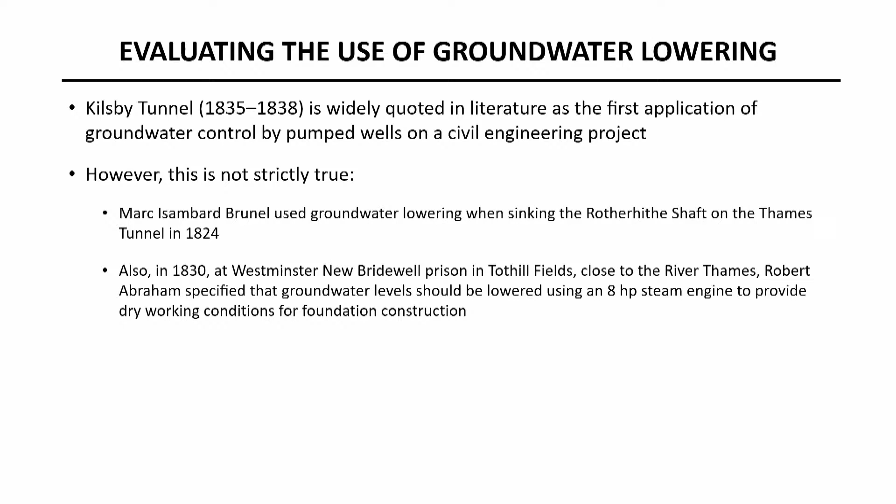And also in 1830 at Westminster New Bridewell Prison, not so far from here, just near St James's Park, Robert Abraham specified that groundwater levels should be lowered using an 8 horsepower steam engine to provide dry working conditions. But these are pretty small scale. And there's no evidence that Stephenson and his team were aware of these applications. But what they were aware of was nearly 100 years history of quite significant pumping from mine shafts. But I think in terms of construction, the work at Kilsby should be recognised as the first large-scale application of groundwater lowering on a construction project anywhere in the world.

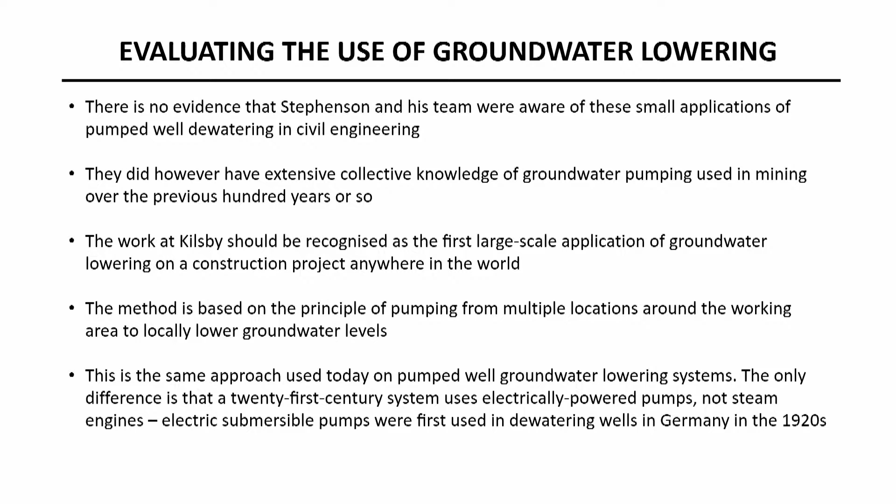And the principle of the operation is essentially to pump from multiple locations, multiple shafts in this case, wells in modern parlance, and that would lower the groundwater level. It's the same approach we use today. The only difference is today we would use, generally speaking, electrically powered pumps, not steam engines. And electrical submersible pumps were actually first used in dewatering on the Berlin subway in Germany in the 1920s.

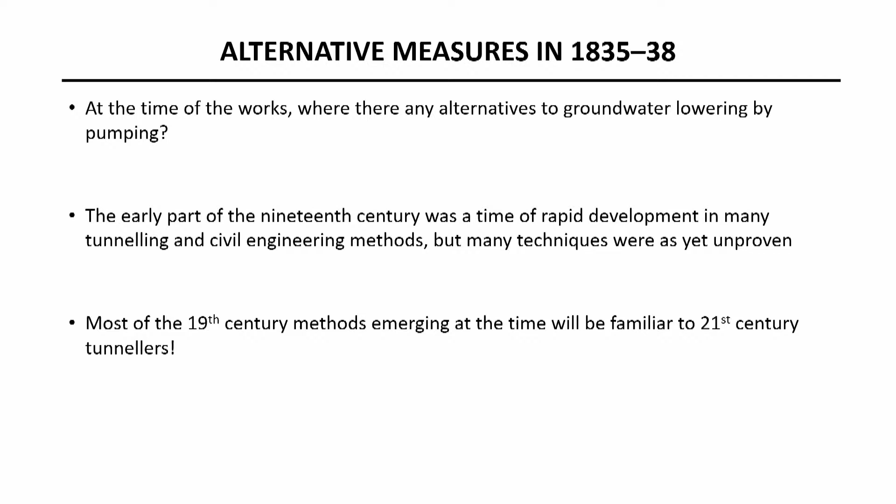And finally, was groundwater lowering the only solution? At the time of the works, were there any alternatives to groundwater lowering by pumping? Because this time, the early 19th century, was a very dynamic time in terms of technique. So I've come up with some other options. And interestingly, most of these 19th century techniques are still used by people in this room today.

So first thing is, we could have sunk the shafts as caissons maybe. Caisson sinking, we build a cutting edge, and then you build your structure above the cutting edge, and nowadays you jack it in the ground. Back then you would have put kentledge on to weigh it in the ground, and your structure would have been masonry, brickwork, or cast iron tubbing. And obviously by sinking it as a flooded or wet caisson, you would have counterbalanced the quicksand if you did it right. I think it's a pretty hard sell. You've got the hard glacial till above the sand, and even if you sunk the shafts, you wouldn't have really dealt with the tunnelling. So I'm giving that a no.

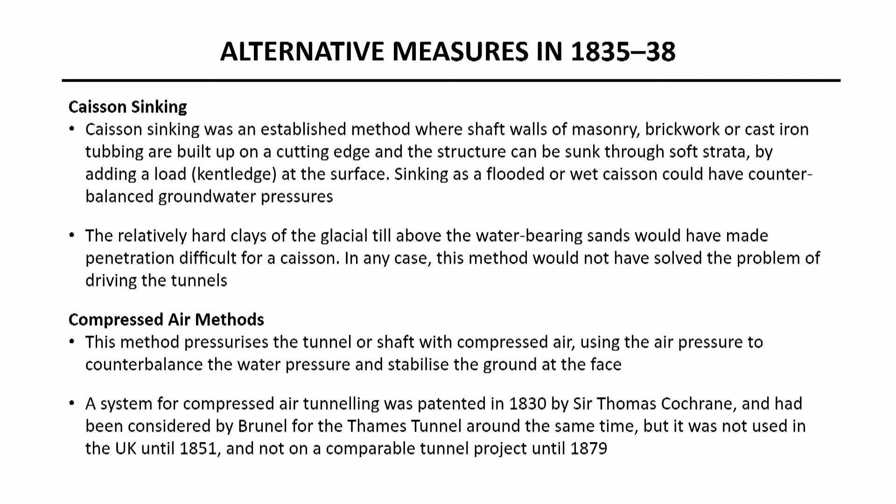The approach at Kilsby was a pumping approach, but for groundwater control we can sometimes go for the exclusion approach. And exclusion approach basically would involve trying to install some vertical barriers either side of the tunnel. So essentially we're isolating the tunnel by toeing into the mudstone bedrock below. We then do a limited amount of pumping inside here, and we keep the water level high on the outside. Dramatically reduces the pumping volumes. One of the challenges is that at its deepest, the mudstone's about 40 metres down, so it's a pretty challenging depth to get a cut-off method down to.

An option we might think about today would be steel sheet piles. In the 1820s, cast iron sheet piles were in use. They've been available for a little while. They'd taken over from weaker timber sheet piles, but there's no way they'd have been able to be driven to the required depth. We could have permeation grouted, and cement-based grouting had been developed in France in the preceding decades, but it wasn't applied in the UK until the 1850s, after Kilsby.

In any event, the sands were probably too fine to be dealt with by cement-based grouts, and the more effective and more penetrating chemical grouts weren't developed till much later. One of the first was the Joosten process, patented in Germany in 1925.

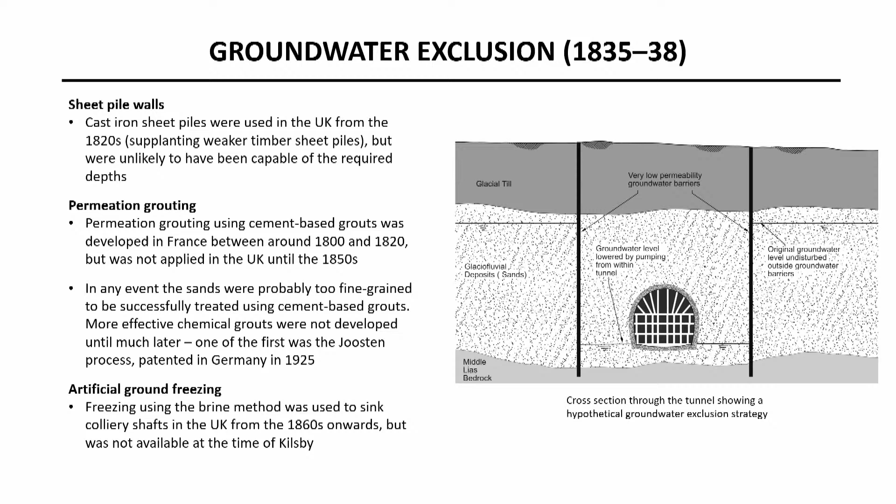Ground freezing has undergone a bit of a renaissance in the UK at the moment for various cross passages at Silvertown and other places, but it's a 19th century technology. It was first documented as being used on mine shafts in the UK from the 1860s onwards, but obviously it wasn't available at the time of Kilsby.

So now Mike and I agreed that we conclude with going through Stephenson's many achievements. The first thing is that in terms of project management organisation, the London-Birmingham Railway was a model of project planning organisation. Stephenson had an experienced team, and he recommended established tunnelling techniques suitable for the conditions expected. But the methods weren't suitable to the quicksand conditions he encountered, and decades of canal construction had shown how difficult it is to work in such bad ground.

But after the early shaft sinking works encountered the quicksand, Stephenson and his team drew on experience in the mining industry, and they developed the solution using multiple steam engines pumping from shafts. They used flat rod systems to transmit power horizontally to minimise the number of engines needed. Stephenson established a large-scale groundwater pumping system, unique for the time, to lower the groundwater levels and stabilise the quicksand. The reported pumping rate was 136 litres per second for several months, and ultimately, despite cost overruns and delays, the tunnel was constructed.

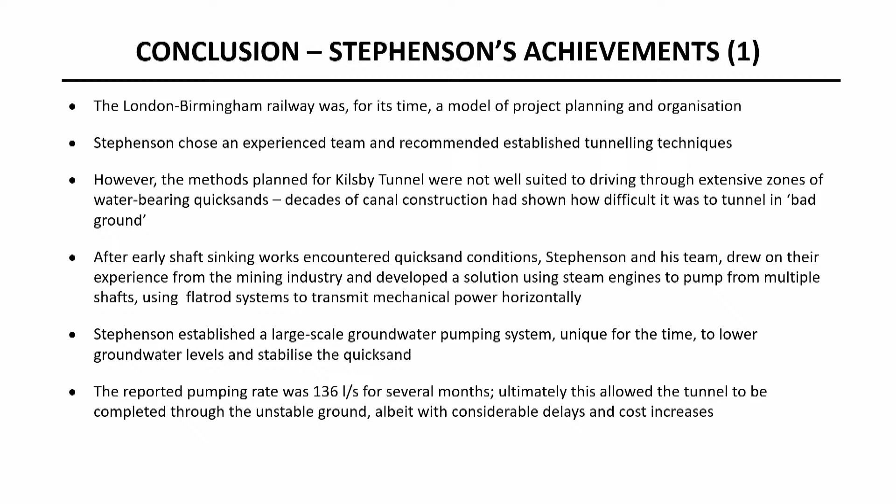So, in terms of geology, the modern geological information tells us quite clearly the bulk of the tunnel was driven through this benign tunnelling medium of the Middle Lias bedrock, but 400 metres of the tunnel was through a buried channel of water-bearing sand of glacial origin, the true cause of the quicksand. But in the 1830s, the impact of glacial processes in British geology was not widely accepted.

And I'm not convinced that even Stephenson, as the premier engineer of his time, would have known about such arcane and controversial theories. So I genuinely think that based on the knowledge of the time, Stephenson encountered unforeseen ground conditions and the quicksand zone was missed by his borings. But despite the lack of existing methods of analysis, observation and interpretation of the behaviour of the ground, which is at the heart of tunnelling methods, let them navigate through the problems, and the groundwater lowering methods were used to drain and stabilise the shafts.

I think when you combine contemporary knowledge and modern understanding, it really shows the scale of Stephenson's achievement. And like Mike said, he was hands-on as a project leader on this tunnel as well as being the directing intelligence of the whole railway as well. And finally, probably the most pragmatic achievement is, if you go to Birmingham today, West Coast Main Line trains still pass through this tunnel. So those of you who are building railways today, you should really expect people to be using your product in two centuries' time.

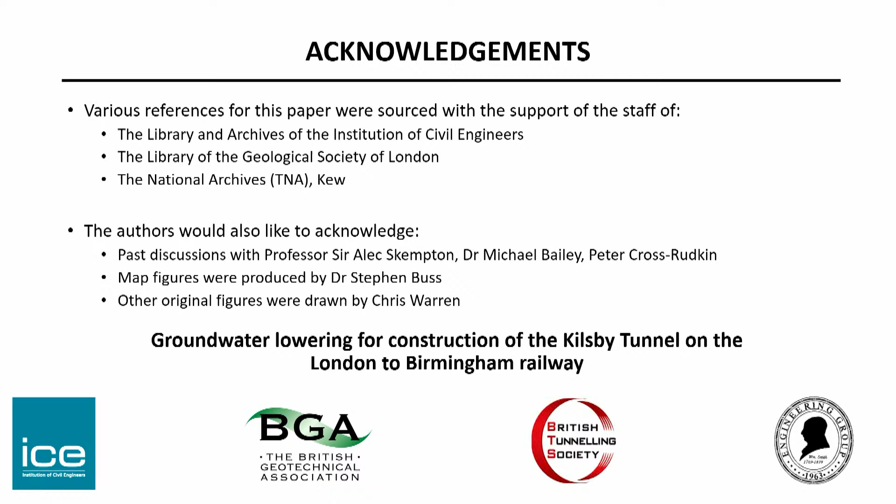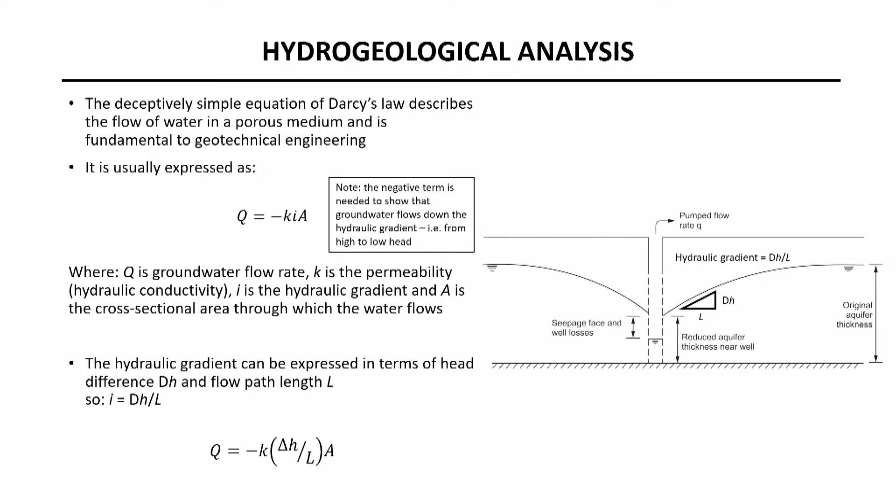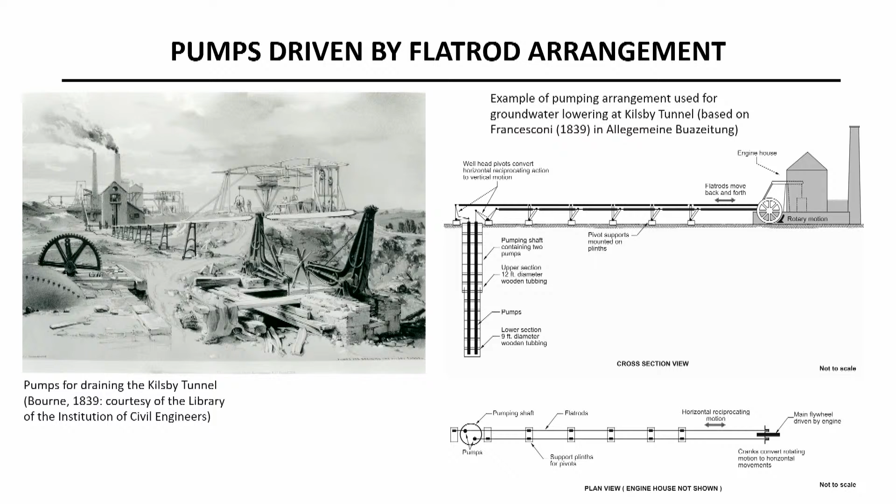Now, such things occurred, particularly, for example, the tunnel I worked on a lot in Storebælt in Denmark, where at the end of the Ice Age, the North Sea broke into the Baltic via Storebælt, and we had a borehole that, way down into the rock, had cobbles and boulders in. And we hit it in December 1993. And what was apparent was that this was where the high energy flow flowed into the Baltic and deposited these very large granular materials.

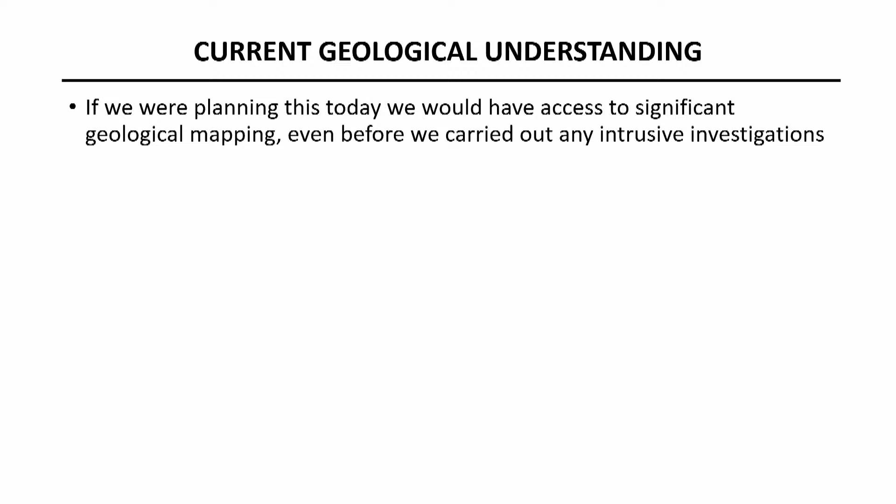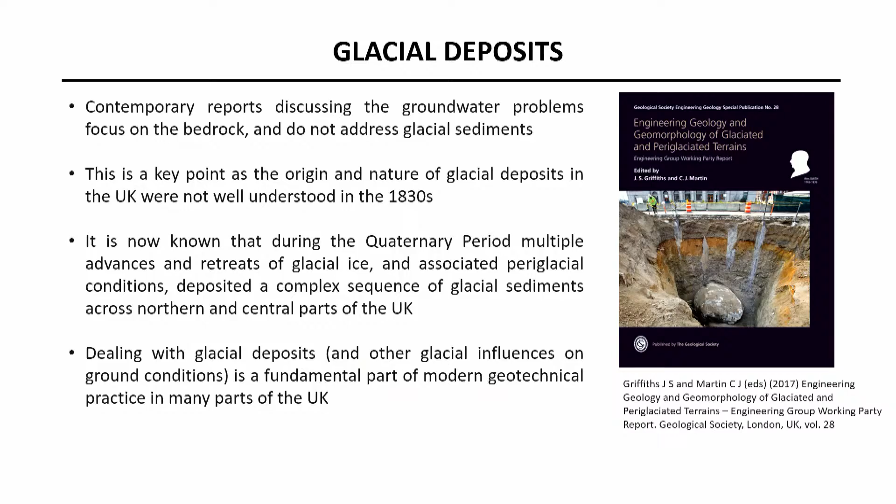And I also worry about the Africa to Spain tunnel, where, if you imagine the Atlantic flooding into the Mediterranean, there must be some horrible feature there somewhere for that tunnel. So my question is, do you think that was the main outlet? Because it doesn't look to me or sound to me as if it was the classic sort of outflow point of that lake.

Well, the answer is I'm just reporting in the paper that I led other people's work. If you look at the reference there, the paper says, Fred Shotton and his key role in the Wolstonian and Devensian stage controversies. I don't know how much genuine controversy there is in UK geology, but the Midlands seems to be a hotbed.

There's a whole series of really fascinating papers in some quite obscure journals in the 60s where people are looking at the nature of a sand exposure somewhere in the Midlands, and then it seems to me extrapolating out wildly to get a bigger picture. But I'm just going by the stuff. I'm working on a follow-up paper to this where we do look a little bit more at the geology. But again, we're not doing fieldwork.

What we're doing is trying to understand how credible this concept is of the lake feeding into the tunnel. But it goes to a point. It's a buried glacial channel, and as you agree, they're just bad news wherever you find them if they've got granular material in them.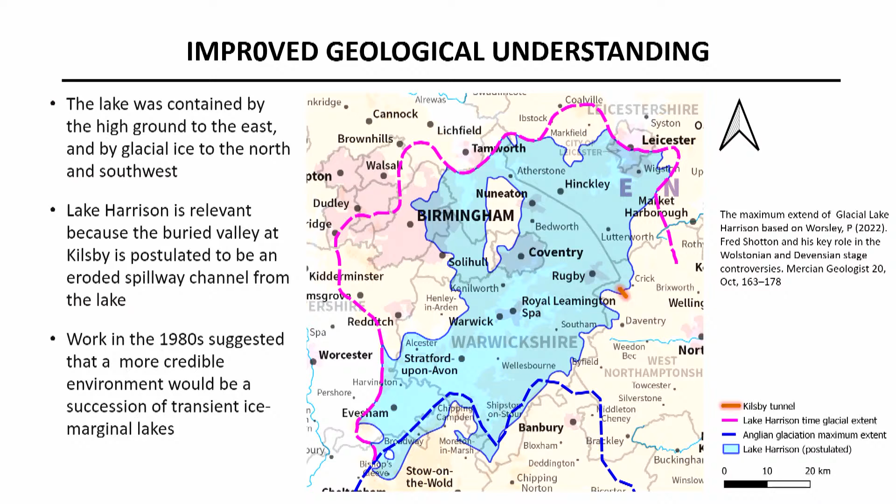Sure. That was in its infancy at the time, but, as you say, had Robert Stephenson happened to meet Mr. Smith in the pub one day, they might have been able to have a conversation and gone and mapped the hills and figured out what was going on. But again, remember, Smith's map, broadly speaking, is bedrock, which comes back to the work by Boyd Dawkins, that the equivalent of you lot in the 1850s wouldn't have had the access to the consideration that it was even relevant.

You know, I think that little quotation I gave from LeCount about going to look at the spoil, that was what the little geologists' outings would have been: to go and see what you found, and then you'd speculate about why there were fossils in there or whatever. And once you'd had a look at a lot of these spoil heaps, you might start to develop some kind of better understanding.

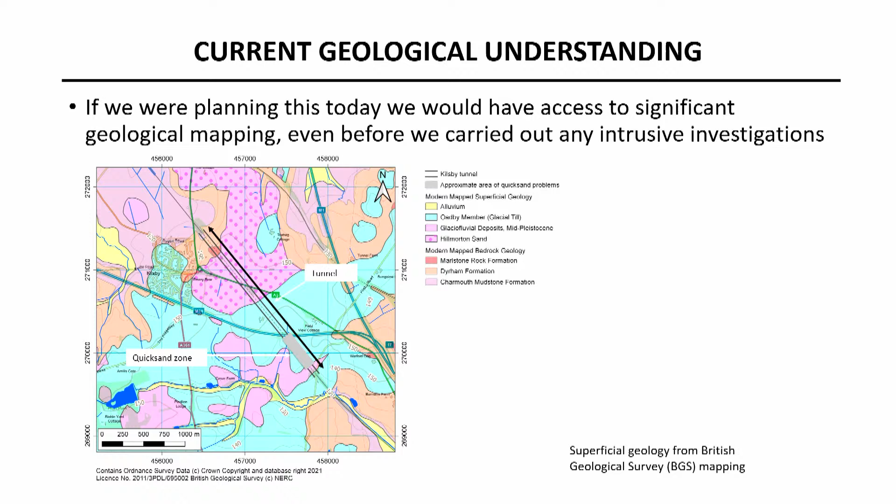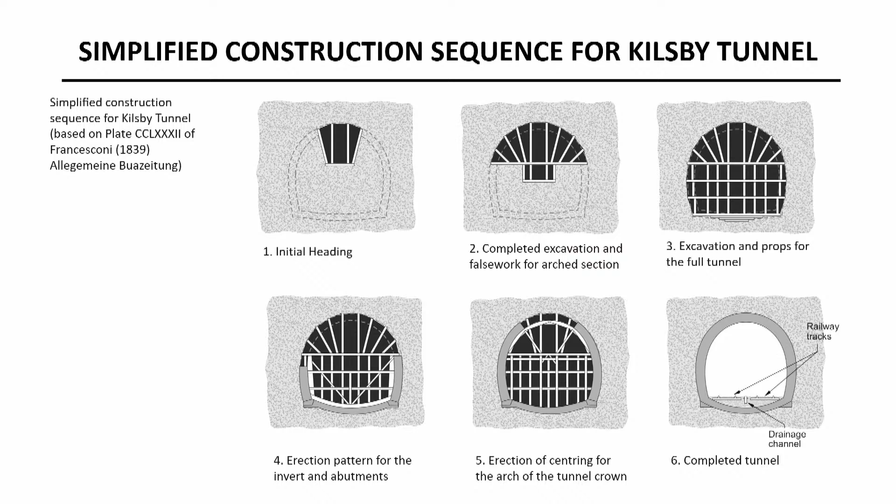I think in Martin's paper he refers to an aerial survey where you can see possible former drainage channels, but it's supposed to be, they did a deal with the canal company, because canal companies like water, particularly in the summer, and so some of it was routed away to the canal.

So we have no evidence. There's evidence that Stephenson mentions in a report that he was talking to the Grand Union Canal to give them the water and they'd want it. But this is one of our hypotheses, shall we say.

John Goodyear, no affiliation to the BTS. Following on from that last question, when the groundwater started being pumped, was there a filtration system of sorts to separate the quicksand? Or when the water was being disposed of, is it a case of there being a large quantity of solids as well to essentially shift? It's a good question. There's no evidence of that.

I mean, we haven't mentioned that particularly the pumping shafts were made from timber tubbing. And there's a great way to visualise what timber tubbing is. It was like a well-made barrel where you have hoops or curbs and vertical planks. And I can visualise in my mind that nowadays we have perforated well screen, well constructed. The gaps between the planks would have to be filtered, and then these are big shafts, not wells. So if you get a few cubic feet of sand in the bottom, it will come through.